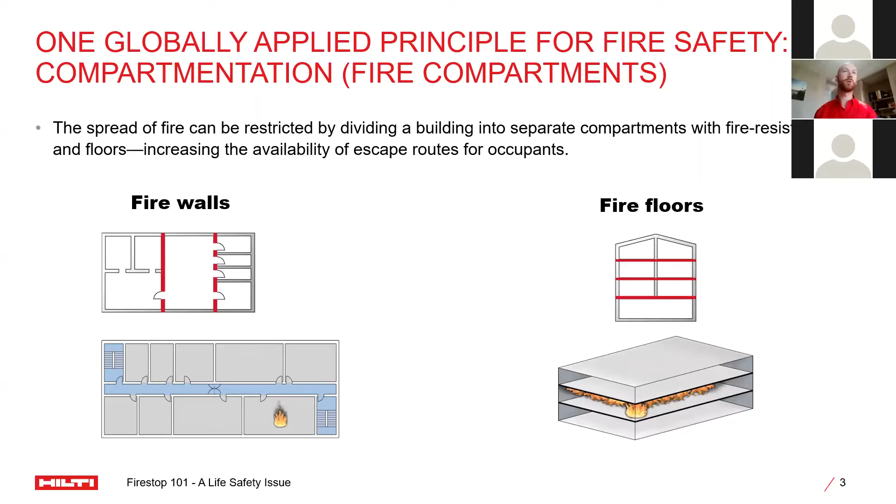So when designers are designing a building, they'll break up that building into subsections using both fire-resisted rated walls and fire-resisted rated floors.

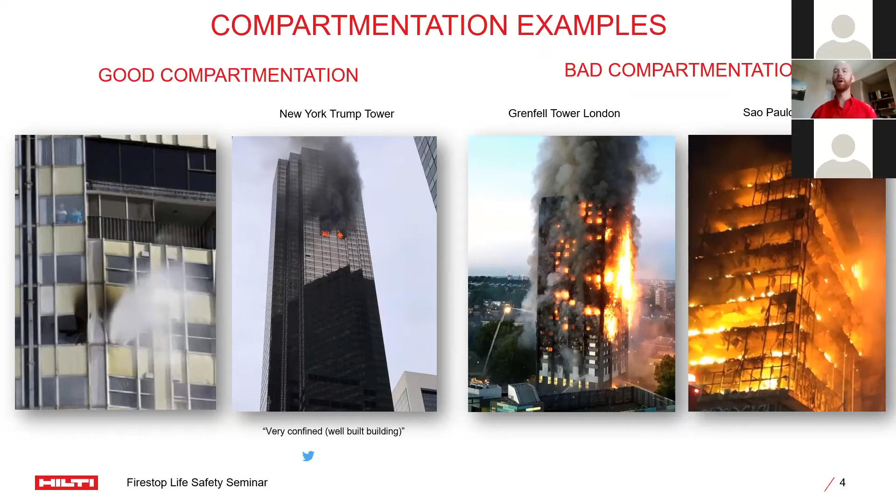Some poor examples of when fire compartmentation goes wrong. For example, in Grenfell Tower in London, this was a fire that happened in the middle of the night in a residential building, and it spread rapidly and quickly throughout that building because of poor fire stopping, resulting in several deaths. So what we're trying to do with good compartmentation is these examples on the left, and avoid these horrible life safety issues on the right.

So we've got the concept of compartmentation. Our designers have built this building with subsections using fire-resistant rated floors and walls, but we do have areas in this building that allow for the spread of smoke and flame.

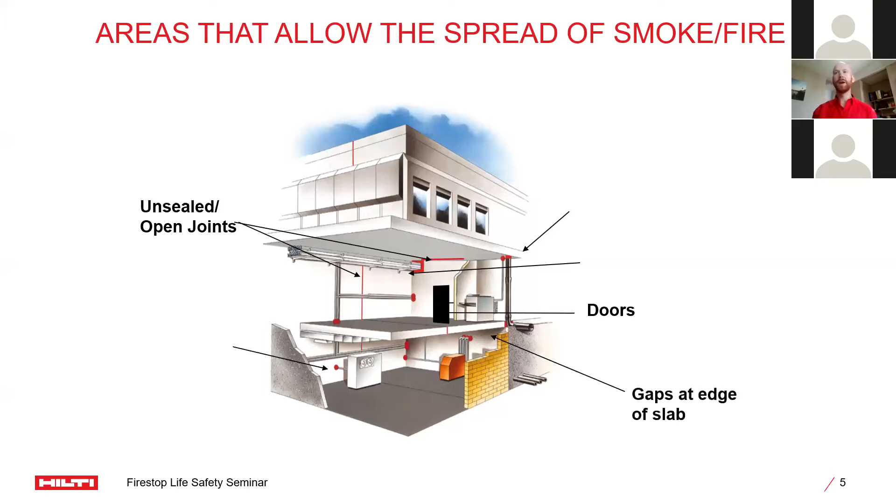These areas would be unsealed or open joints, such as wall-to-wall or floor-to-floor expansion joints or head-of-wall joints that we need to be looking at, doors or enclosures that we will talk about a little later in this presentation, and gaps at the edge of slab, more commonly known in the industry as curtain wall applications for fire stopping.

And then unsealed pipe penetrations, ducts, cable penetrations for cable bundles or cable trays, and membrane or one-sided penetrations, most commonly outlet boxes or tub boxes that we'll see have deteriorated our fire-resistant rated walls or floor assemblies. So these are the areas that are going to allow the spread of smoke and flame and need to be addressed with fire protection products.

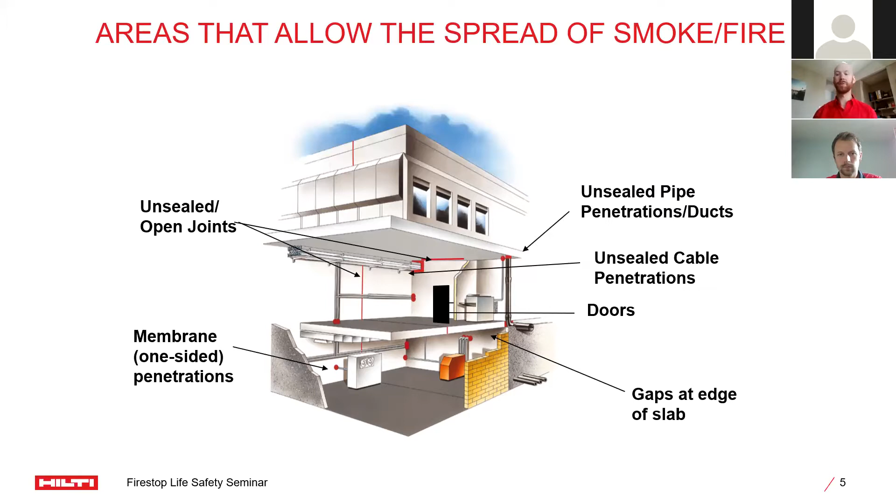I'll pass it over to Andre to talk about some of the regulations that we have in Alberta.

So let's start the most exciting part of today's presentation, which is regulation. There are 4 main documents that regulate activities related to fire safety in new construction and renovation. The first is the National Building Code of Canada. As a model building code, it has no legal status until it's adopted by a jurisdiction that regulates construction, so in Canada it will be provinces. This code forms just the basis for all provincial building codes. For federal buildings such as airports and military projects, we should follow the requirements of this code. All other residential and commercial projects in Alberta should be designed and built in accordance with the provincial building code, something like National Building Code of Canada, Alberta edition. The latest edition is 2019. So Alberta is committed to use the National Building Code of Canada as a base document, and we just modify it to suit Alberta's needs in regulating design and construction.

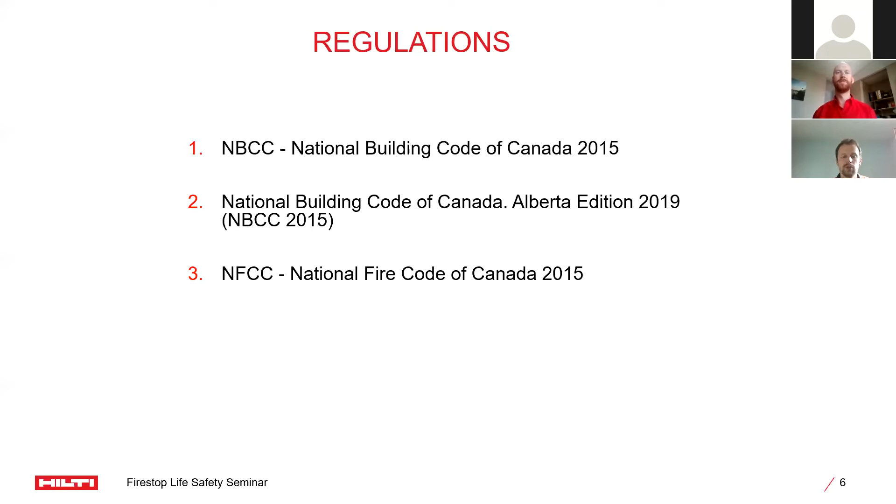So the next document is the National Fire Code of Canada, 2015. A building can be designed and built fire safe, let's say 30 years ago. In order to keep it fire safe, we should follow the requirements of the National Fire Code of Canada. And the last one is regional and municipal laws and bylaws.

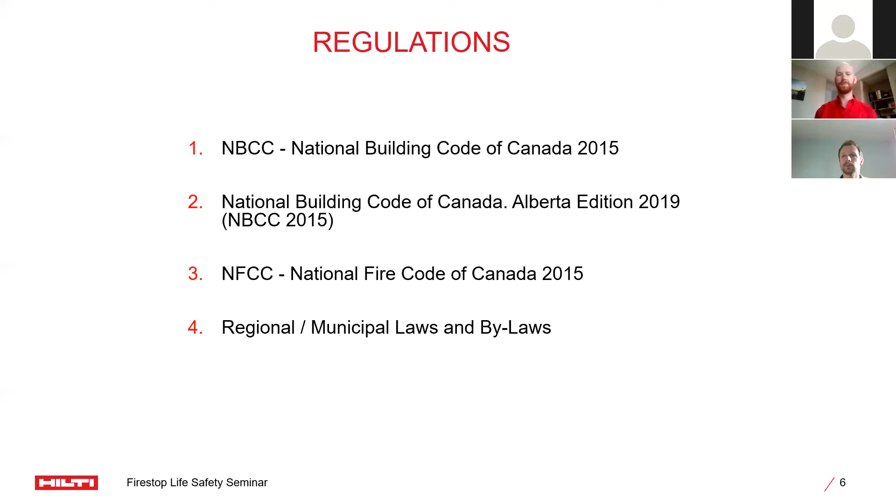Now we'll go through some useful definitions that the Firestop community should be familiar with. The first of which being fire resistance rating. This is the rating that happens to the substructure, and it means the time in minutes or hours that a material or assembly of materials will withstand the passage of flame and the transmission of heat when exposed to fire.

So what this is basically saying is when a designer is looking at different fire-resisted floors and walls, there are specific conditions of a test that those will need to go through, burned and timed, to make sure they pass this test for a duration of time. When they have that test passed, it'll be passed by a third-party organization, and it will be adopted into different floor or wall assemblies. So they will have what's called a fire resistance rating.

Other terms we need to be familiar with are the difference between combustible and non-combustible type materials. The difference being, when exposed to flame, combustible materials will tend to lose a lot of their mass. Materials like wood, plastic, or insulation will burn in a fire test, and a lot of the time they lose a lot of mass or deteriorate quickly. Whereas non-combustible materials like concrete, brick, or metal will hold a lot of their mass and not necessarily melt right away in the event of a fire.

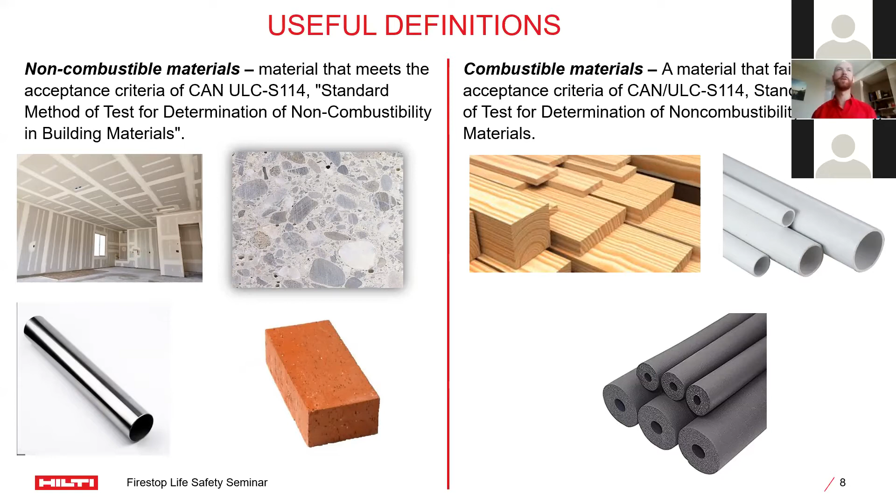Which brings us to our next definition, quite familiar within the Firestop community: the concept of intumescence. It's a term that describes materials designed to expand significantly when exposed to heat. So when thinking about fire stopping, if we've got a combustible plastic pipe penetrating a fire-resistant rated wall, we know that pipe is going to melt quite early when fire hits it. So we need a material that will expand and choke out that pipe so it doesn't leave a hole where the pipe has melted. The concept of intumescence is very familiar to the Firestop community, and we need to know when to apply this product on which type of applications.

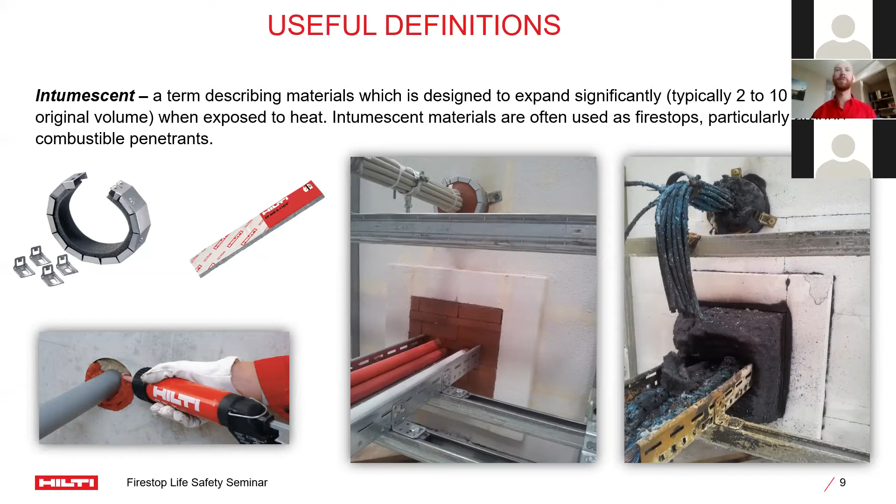Another term we use quite often is annular space. Annular space is the distance between the outside of your penetrating item and the inside of the hole. Oftentimes there'll be more than one distance, so a minimum and a maximum of annular space. This is because, as much as the construction industry wants everything centered, oftentimes that penetrant will likely be off center. So you'll have a minimum and maximum annular space when dealing with these types of penetrants. We need to be familiar with this when dealing with fire protection and understanding the tested systems and what that language means.

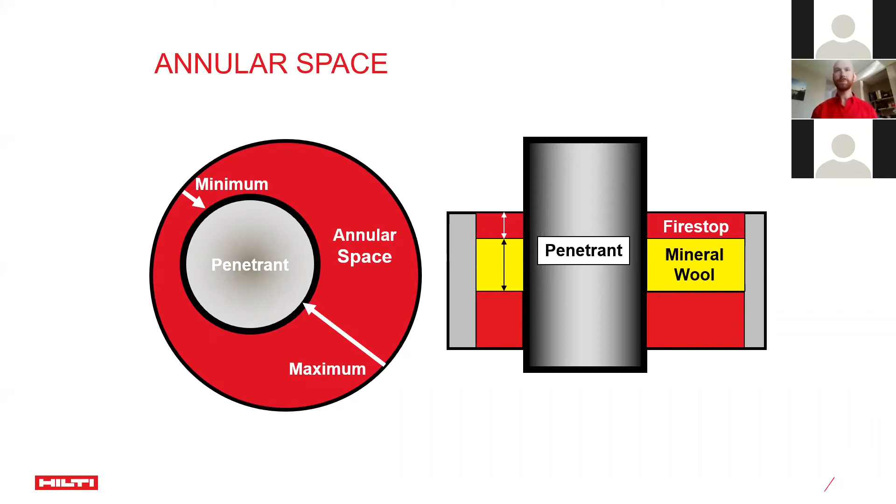One term I see misused quite a bit in the construction industry is the term firewall. Not every wall in a building with a fire resistance rating is a firewall — it's a very specific type of construction or application. A firewall is a type of fire separation of non-combustible construction that divides a building or separates adjoining buildings to resist the spread of fire and has a fire resistance rating as prescribed in the code. The biggest thing about it is it's got structural stability to remain intact under fire conditions for the required fire rated time. So the concept of this wall is its own substructure.

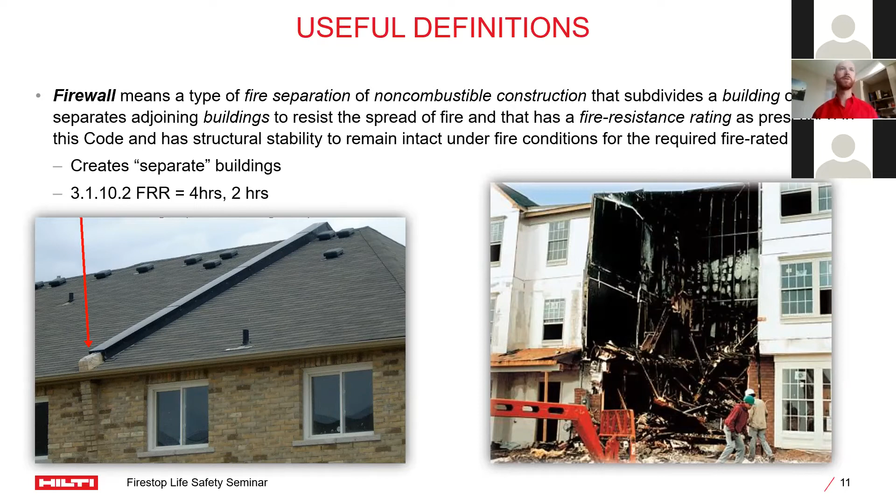If we look at the picture on the right, on the fire side of this wall, this whole building is able to collapse under that fire, but the non-fire side and the wall itself, because it's structurally intact, will remain separate and intact after that building has collapsed, protecting the non-fire side of this application. So it's got very specific requirements for this firewall, and we just need to know the difference between a fire resistance rating of, say, a regular gypsum wall versus what a firewall is, because they will have different requirements to them, which we'll get to here in a sec.

Through-penetration firestop systems are tested to CAN ULC S115. The most common term we use is an F rating, which will be thought of as a fire rating or flame rating to the community. It's basically the duration of time in which flames do not pass through the system. So if we've got a fire resistance rated gypsum wall, in order to achieve a 1 hour fire rating, no flames can pass through that wall for a 1 hour duration from the fire side to the non-fire side. This is what we're going to see with the majority of our ratings.

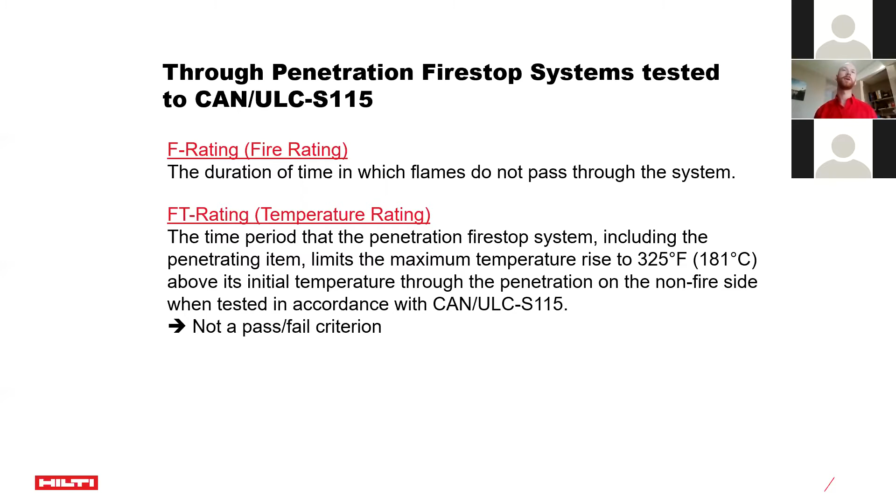Another rating we might see in some applications is the FT rating, a temperature rating. This is the period of time that the penetration firestop system, including the penetrating item, limits the maximum temperature rise to 325 degrees Fahrenheit above its initial temperature through the penetration on the non-fire side, when tested in accordance with CAN ULC S115. Essentially this is trying to limit the temperature rise from the fire side to the non-fire side, including that penetration. We'll talk more about FT ratings and where we might find them in our Alberta construction projects in a few slides.

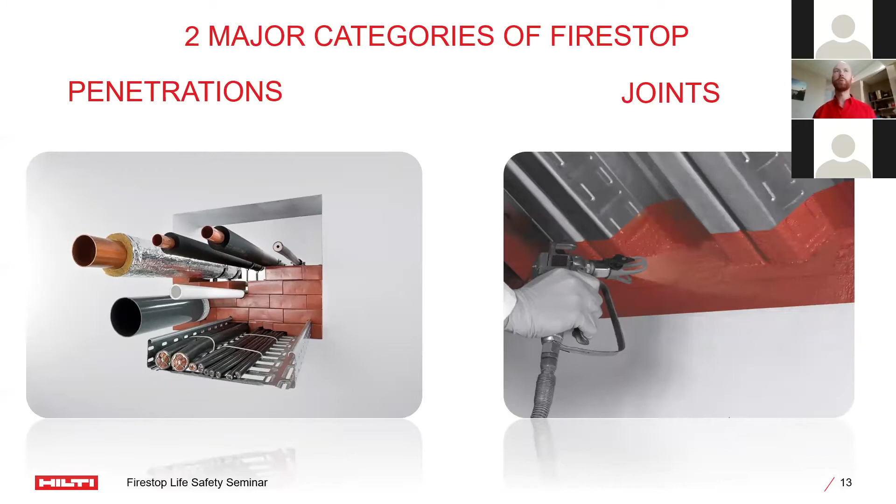There are two major categories of firestop that we will see in our projects: penetrations and joints. There are a lot of types of materials we're going to see on our projects, and it's important to know how these penetrants react in a fire.

For example, the most common contrast I can show you is a metallic pipe versus a plastic pipe, combustible versus non-combustible. We know that a non-combustible pipe, in the event of a fire, may not melt, but it will transmit heat from one side of that assembly to the other quite well. Whereas a plastic pipe will likely leave a hole in that fire resistance rated assembly. So we need to understand how these different types of penetrants react in a fire in order to provide the correct solution.

Other penetrants we might see in construction projects include cable bundles, cable trays, insulated metal pipes, ducts or mechanical shafts, which we'll get to in a later slide, and mixed or multiple penetrations. For example, contractors on site already have a hole, and instead of making his own separate hole, an electrician decides to run his cables through the hole already created. So we have cable bundles and different piping running through that same opening. We need to know what types of penetrants are on our sites in order to provide the correct solution for them.

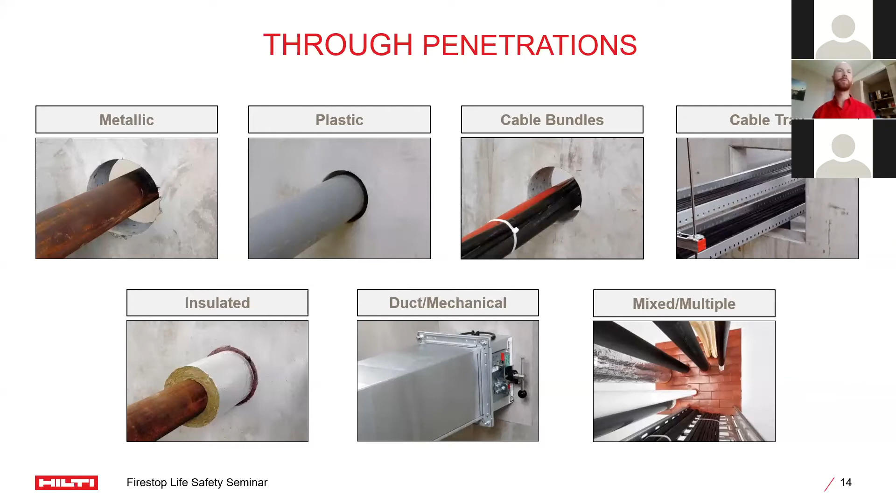Now, diving into a bit of the National Building Code, I'll give you some verbiage for clarity. When looking at penetrations specifically, the code gives us two options. Penetrations of a fire separation or membrane forming part of an assembly required to have a fire resistance rating shall be sealed by a firestop that is subjected to the fire test method CAN ULC S115, with an F rating not less than the fire protection rating required for closures in that fire separation. So our first option is to deal with that penetration with a firestop tested to CAN ULC S115.

Our second option is to cast that penetrant in place. For example, if you've got a concrete slab, the code allows for a pipe to be cast into that slab and not treated with a firestop product.

There's some ambiguity or loose language in this second option, in my opinion, because it's not commonly sought after in the construction industry, as it doesn't allow for any thermal contraction of that pipe. So for the plumber's concern, if the pipe is expanding or contracting, it won't be allowed to if it's cast into that concrete slab. Secondly, this allows for plastic pipe to be cast into the concrete, and as we know, if there's no firestop product applied around that plastic penetrant, that leaves a void or opening in our fire resistance rated assembly. It's not the code's intent to allow for those kinds of things, so it's not commonly seen in the industry, but these are the two options the code presents to us.

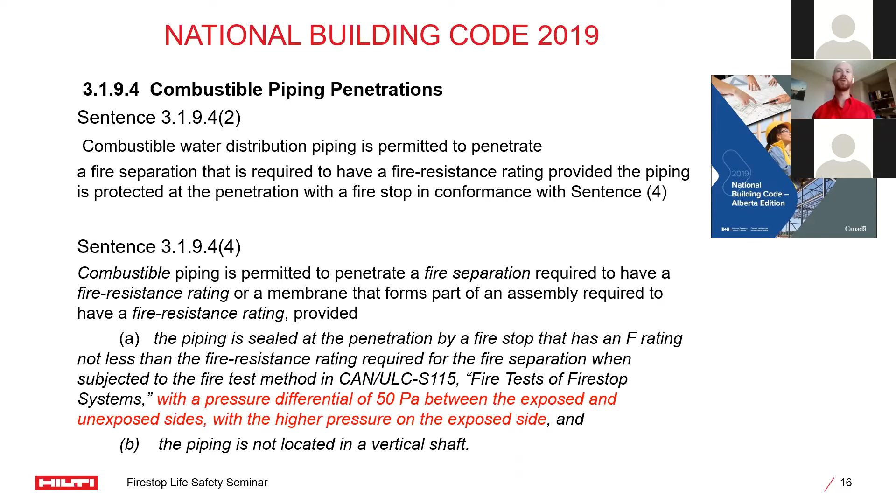Other language in the code I want to point out is the FT rating, the fire and temperature rating I mentioned before. The code language states: penetrations of a firewall, or a horizontal fire separation, that are required to have a fire resistance rating in accordance with Article 3.2.1.2, shall be sealed at the penetration by a firestop that, when subjected to fire test method CAN/ULC S115, Fire Test of Firestop Systems, has an FT rating not less than the fire resistance rating for the separation. So what this is saying is we've got two different types of fire resistance rated structures that will specifically require both a fire rating and a temperature rating.

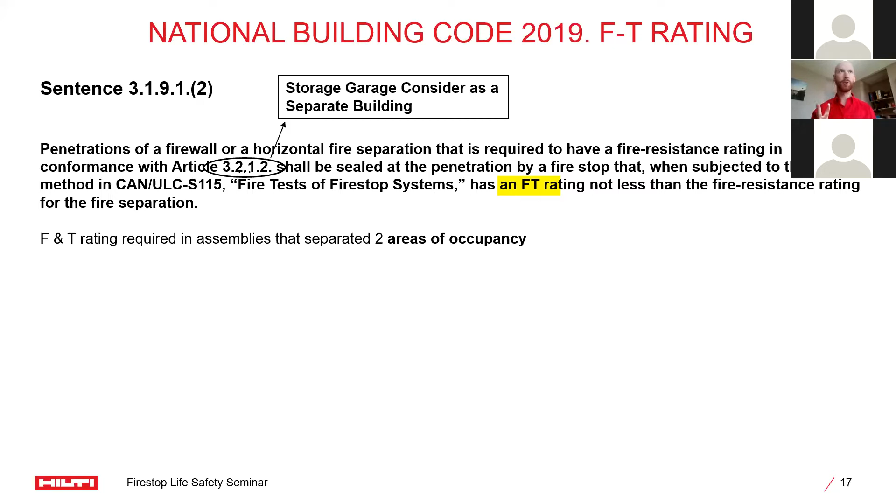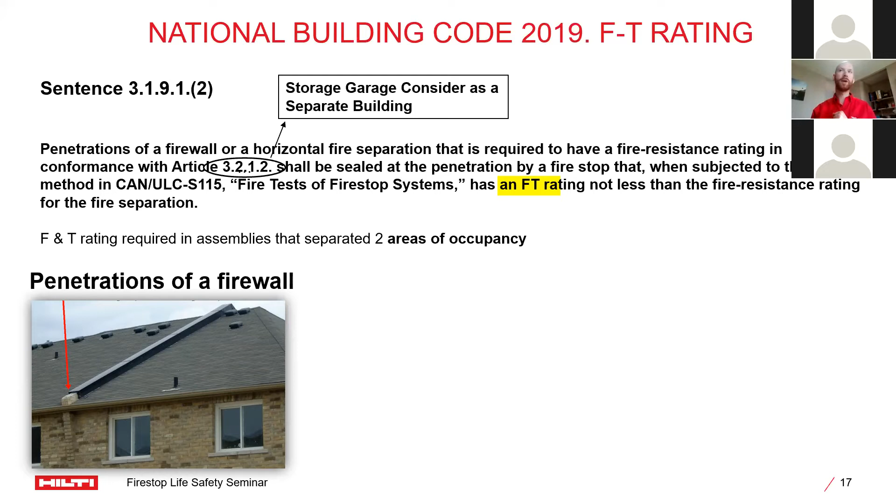Those two applications are in our firewalls. As mentioned, that very specific type of fire resistance rated wall is its own substructure. If we have a penetration running through there, we need to test it to both a fire rating and a temperature rating. The other area we'll see this is a horizontal fire separation, most commonly seen in penetrations of a podium slab between a parking garage and a residential unit. So if we see a horizontal fire separation in our buildings, we need to understand that it needs to pass both a fire and temperature rating.

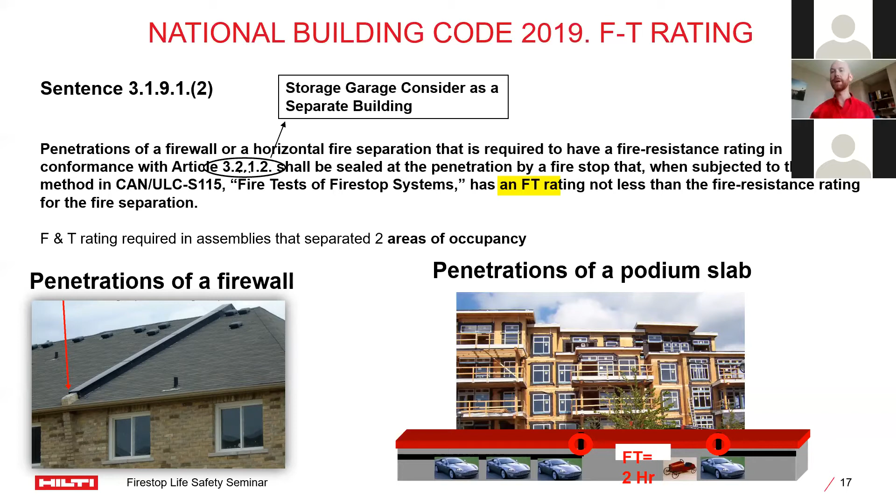So for example, if we've got non-combustible drainage piping through that slab from the residential unit down to a parking garage, we'll need to achieve that fire and temperature rating. To give you guys a bit of a visual of what that temperature rating might look like, we've got two pictures here.

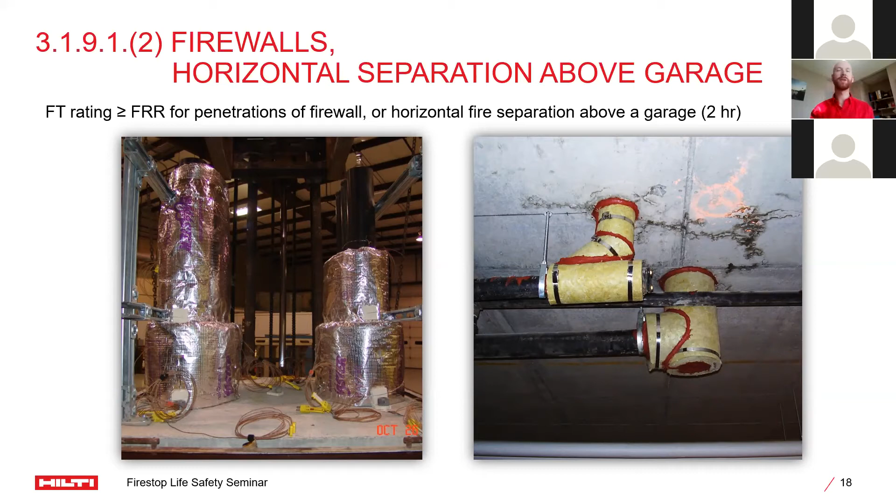Sprinkler membrane penetrations - I wanted to touch on this because there's some language in the code I want to provide clarity on. Sprinklers are permitted to penetrate a fire separation or a membrane forming part of an assembly required to have a fire resistance rating, without having to meet the firestop requirements of sentences 1 to 3, provided that the annular space created by the penetration of a fire sprinkler is covered by a metal escutcheon - it looks like a metal plate covering that sprinkler line.

So I want to provide some clarity here. If we're looking at this language, if we have a sprinkler head that has that metal plate, the code language says that penetration, even through a fire resistance rated assembly, does not need to be treated. However, this does not also encompass through-penetration sprinkler lines if they do not have this sprinkler head and metal plate. So sprinkler lines need to be protected with a firestop product if they're penetrating through a fire resistance rated assembly, unless it's a sprinkler head with that metal plate covering the annular space. Hopefully that provides a little bit of clarity.

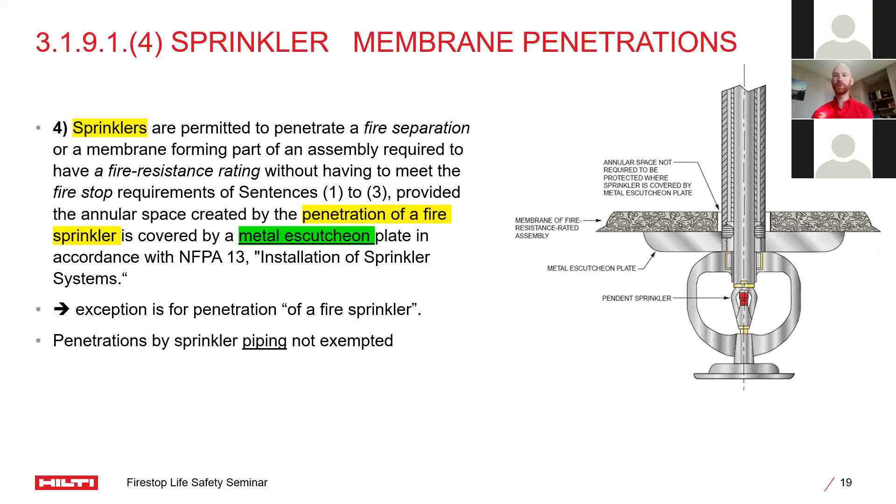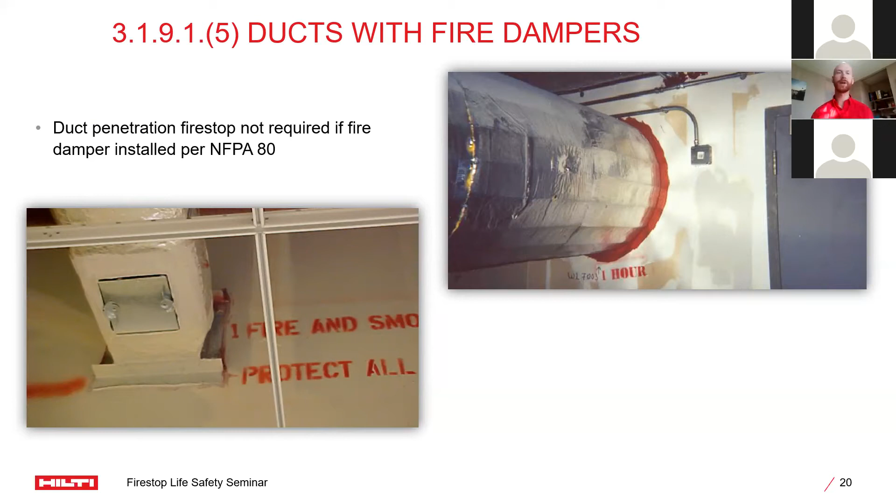So you'll see these on site. They'll have a little hatch at the bottom, and that's for inspection purposes throughout the longevity of that building. So for these types of applications, if that duct has a damper and it's installed as per NFPA 80, you will not need a fire protection or Firestop material around that type of penetration. However, if you have a duct without a damper that runs through a fire-resistant rated wall or floor, we'll need to apply some sort of Firestop material to that application. So hopefully that provides a little bit more clarity on that application.

Lastly, one of the big changes that we had pertaining to fire protection within the 2019 National Building Code of Canada is a notable change to outlet boxes, often referred to in the industry as membrane penetrations. Obviously, if we have an outlet box that penetrates a fire-resistant rated wall, it will deteriorate the rating of that wall. Now there are exceptions to this, and I'll get to them in a second, but the code language states that we do need to apply a Firestop product to this application, unless we meet 4 different requirements to allow for this exception.

The code language is very technical and lengthy, so I'll give you the Coles notes for each one of these conditions in order to waive that fire rating. First is the size of that outlet. The code language says 0.016 meters squared. I don't know about you guys, I can never visualize that very well, so we've translated it here—it's basically a 25 square inch area, so a 5 by 5 inch outlet box.

Next condition is an aggregate area of 100 square inches in any 100 square feet of surface area. To break that down a bit more, it's how many outlet boxes you have in a certain area of rated wall. So if we have a box that's too large or too many of these boxes in that same area, these will need to be fire rated.

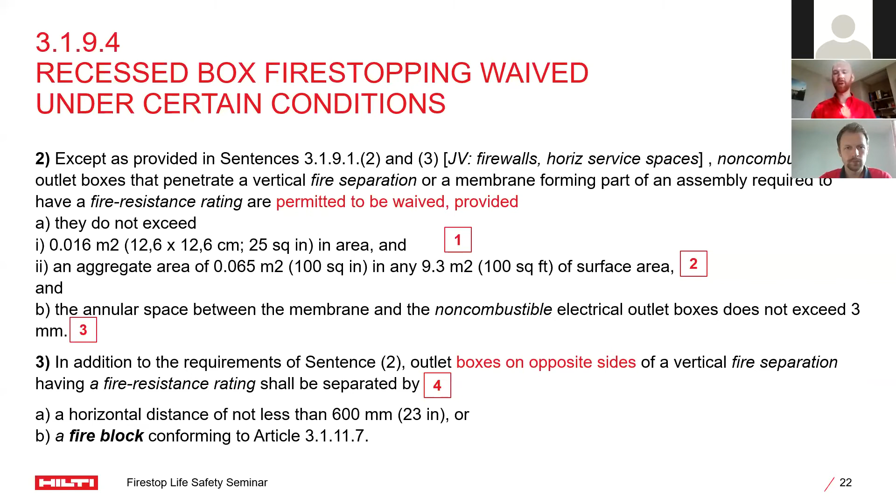I know that this can cause a little bit of confusion, but hopefully that breaks down the code language with a little more clarity on when we do and when we don't require Firestop around those membrane penetrations. I'll now pass it over to Andre to talk a little bit about Firestop joints.

So thank you, Cody. The next part of today's presentation is code requirements for Firestop joints. On this slide, you may see some typical joint applications.

On top left, you see the top of wall joint between the gypsum board wall and concrete over Q-deck, here we have a castle cut. Just below that, we have a joint between the same assemblies, but in this case the gypsum board was cut straight, and the firestop solution consists of mineral wool and spray. Top right is a concrete block wall going up to the concrete over Q-deck above, and the bottom right is a joint between the concrete block wall and the concrete floor.

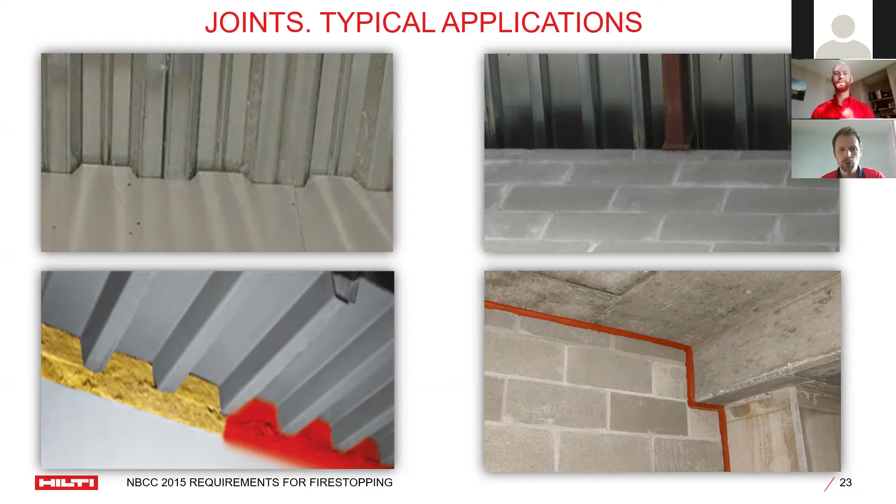What the code says here is much simpler and easier than with a penetration. Requirements for joints fall under the continuity of fire separation statement. It says the continuity of fire separation shall be maintained where it abuts against another fire separation, floor, ceiling, roof, or exterior wall assembly. So if you have a fire separation, it can't stop 2, 10, or 100 millimeters short of the next assembly. The fire rating has to extend all the way to the next assembly, so code doesn't allow any unprotected gaps between assemblies. Top of wall and bottom of wall need to be firestopped.

How should we do it? In accordance with Appendix A, we have to fill in all openings at the junction of assemblies with materials that will ensure the integrity of fire separation at that location. So basically, code says to use firestop materials to fill this gap. And we have a second requirement that says the physical characteristics of materials need to be taken into consideration, so we should use flexible enough materials to accommodate joint movements. This is basically all we have in the National Building Code related to firestop joints.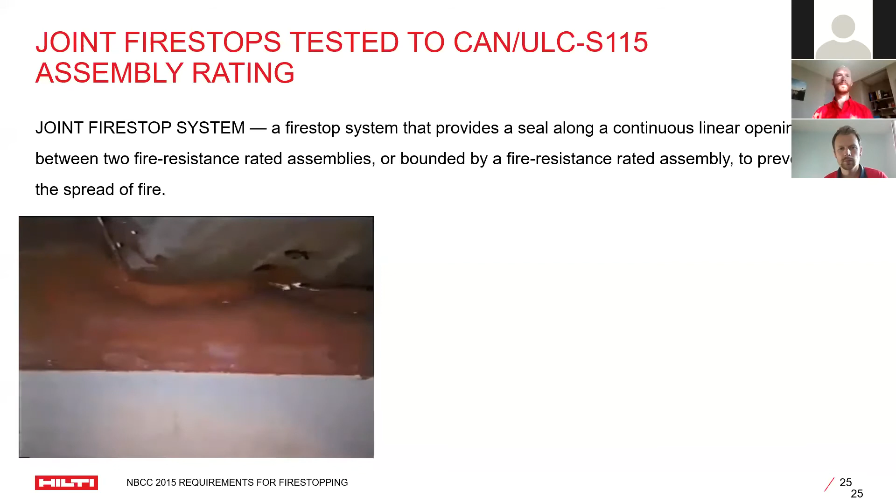After curing completely, it is administered the 500 cycles. This particular test here shows, similar to our UL listing, the 50% compression and extension, and you can note how well the material is adhering to the underside of the metal deck and the gypsum.

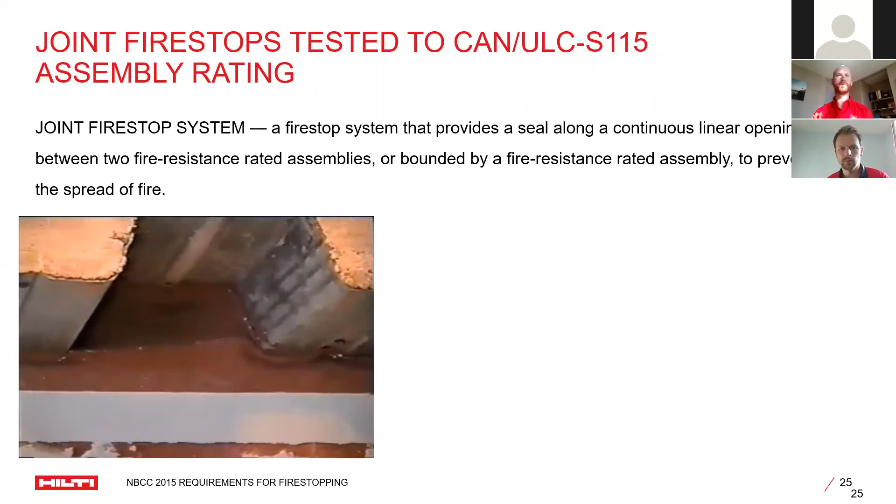So when we ensure the dynamic integrity of the joint, we proceed with a fire test. On the right photo, you may see the joint from the unexposed to fire side. We obviously don't want to see any smoke or fire passage through this joint. Installed thermocouples also measure the temperature conductivity of these joints for T rating.

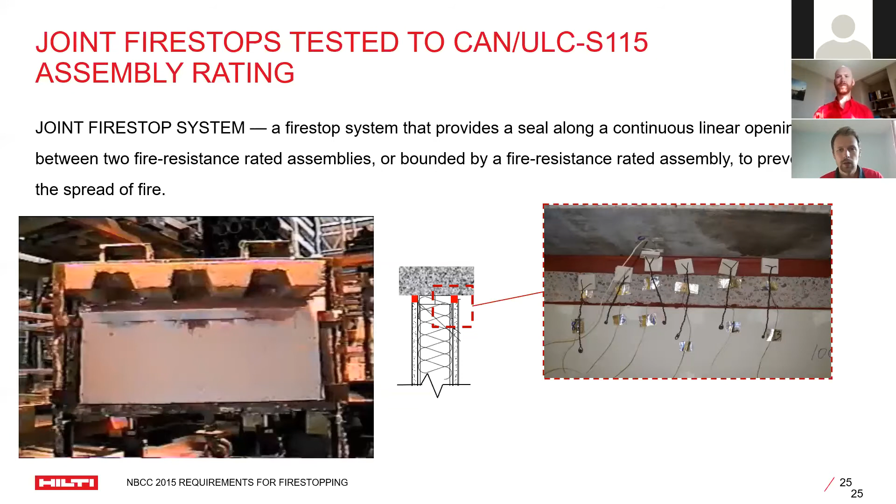Just a few words about the testing. Before we declare that such and such product could be used to firestop a pipe or cable penetration through a rated assembly, it should be tested in accordance with certain standards. For Canada, it will be CAN-ULC S115. This standard gives us clear guidance on how to run the test, what the temperature curve should be in a furnace, and all other necessary details.

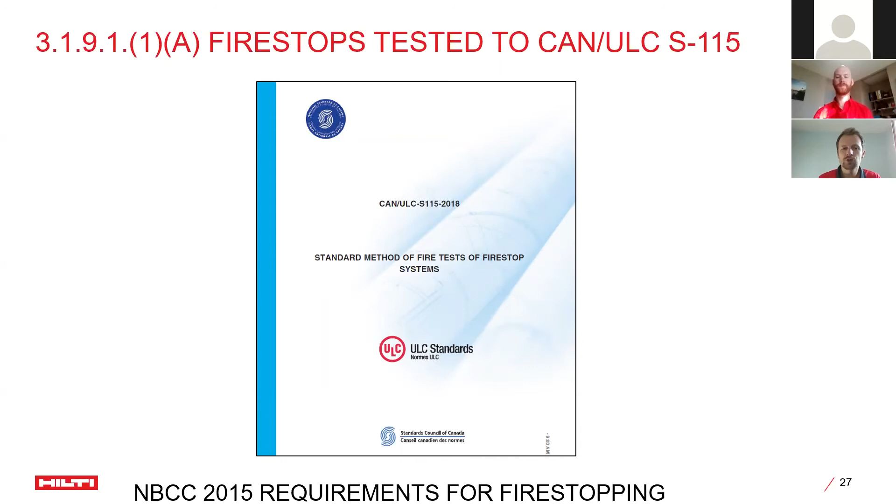The next video shows the way we test our materials at our testing facility down in the US.

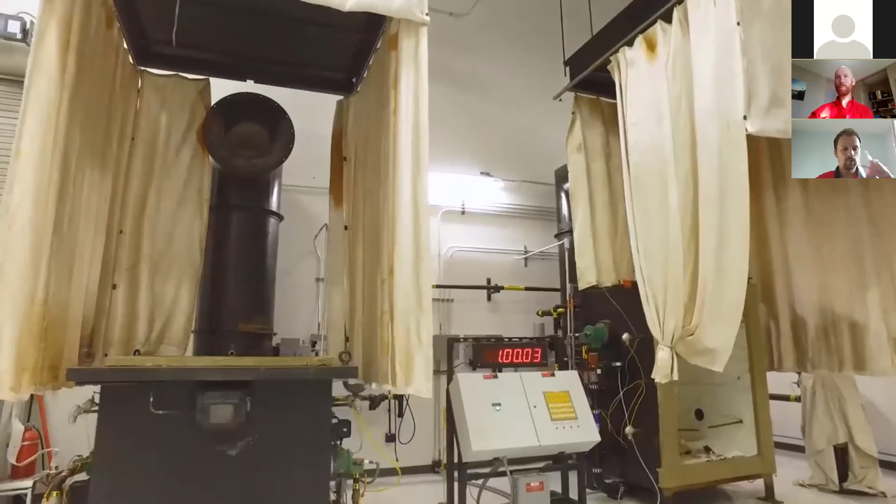Welcome to the Hilti Western Hemisphere Product Development Center. You're in our North America firestop testing facility, where we test all of our fire protection products in accordance with UL, CUL, and ASTM standards. There are two furnaces in this facility. The one on the left is used to test floor or ceiling applications, while the one to the right is for wall applications. The testing process begins in our prep area.

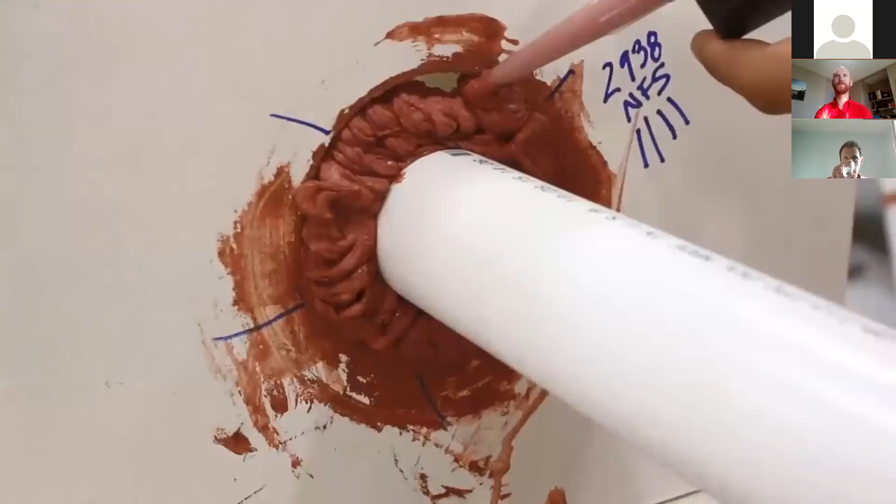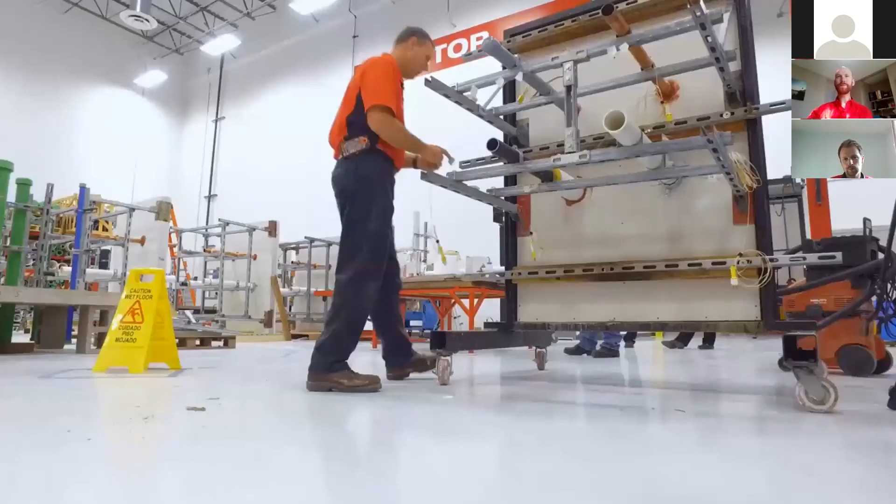In this example, the assemblies consist of plastic, insulated, and non-insulated pipe penetrations. Hilti firestop solutions like FS-ONE MAX and firestop collars are installed around the pipes. Once the assemblies are built, we add thermocouples to measure heat transfer through the assembly and the pipes as required by the testing standards. As final touches are put on the assembly, technicians prepare the furnace and afterburner.

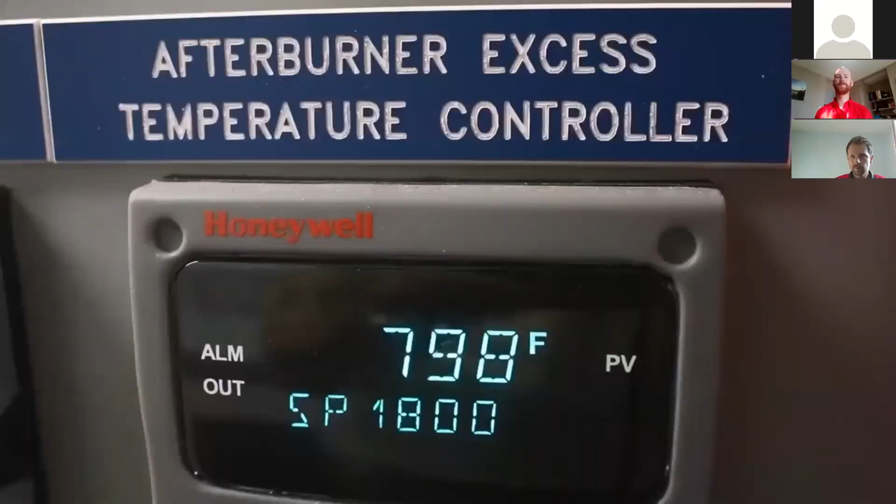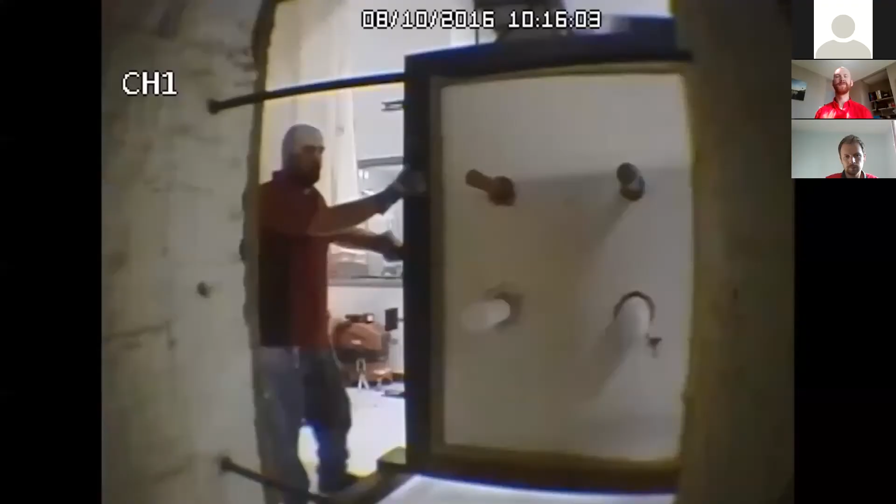The afterburner is a high-powered incinerator that burns the smoke and gases generated by the test itself. When it's ready, the assembly is carefully secured to the furnace. Lead wires from the thermocouples are attached to the monitoring system and tracked with our computer program.

With a mouse click, the furnace's burners are ignited and the test begins.

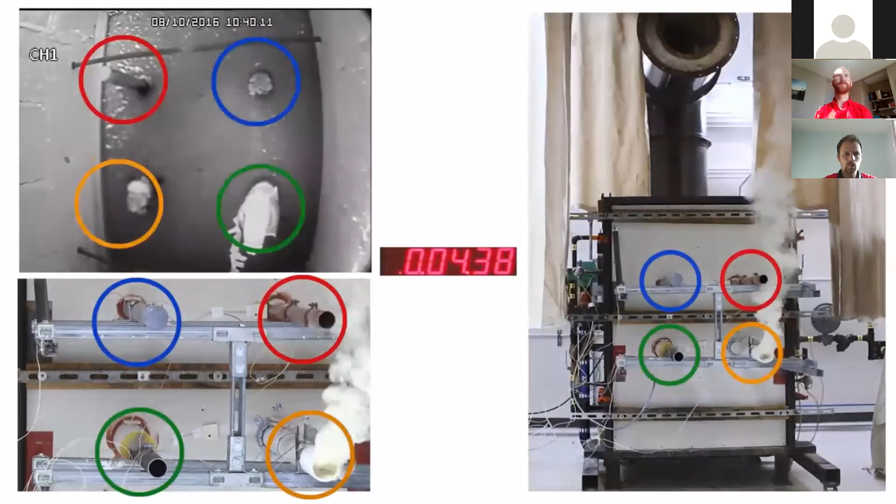Within a few minutes, the PVC pipes and insulation on the fire side of the wall melt away, causing them to ventilate smoke into the room. Heat causes graphite in the products to expand, creating a seal that continuously expands as long as the heat is applied. This closes the pipes and limits the passage of smoke and harmful gases into other parts of the building.

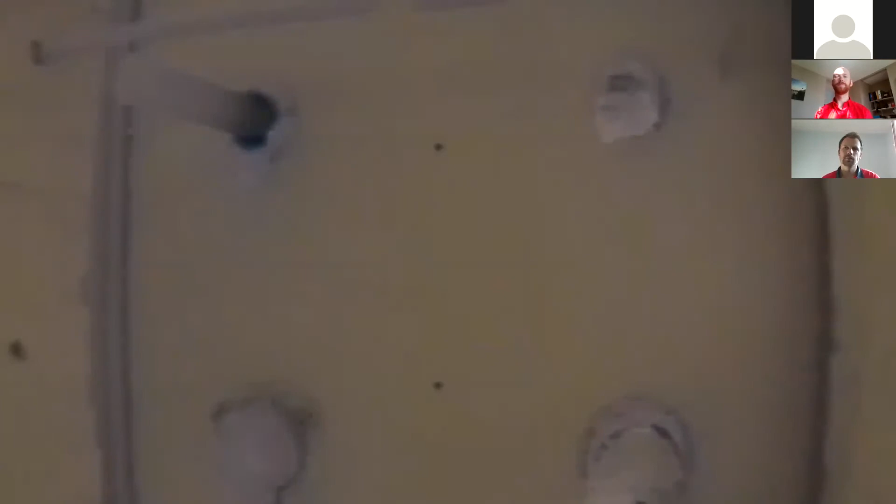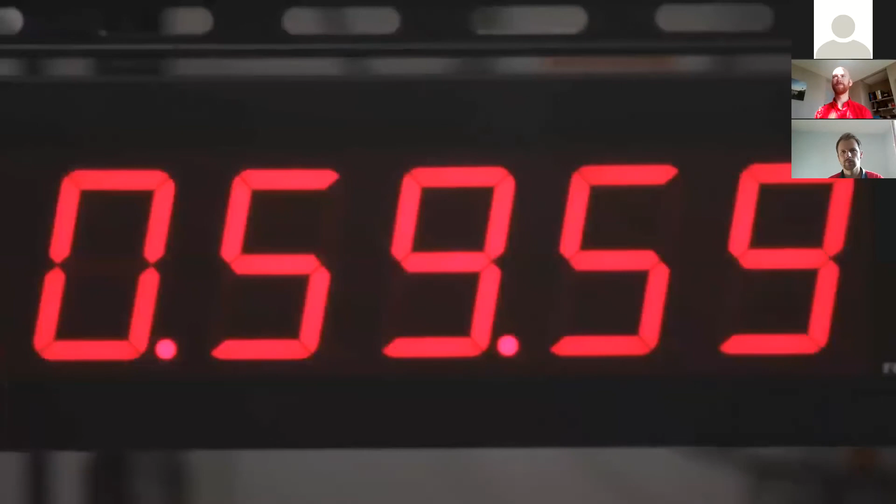After 10 minutes, the temperature in the furnace is 1300 degrees Fahrenheit. The burn test can last anywhere between 1 and 4 hours, depending on the assembly being tested. As the last few seconds tick away in this 1-hour test, the temperature in the furnace is 1700 degrees.

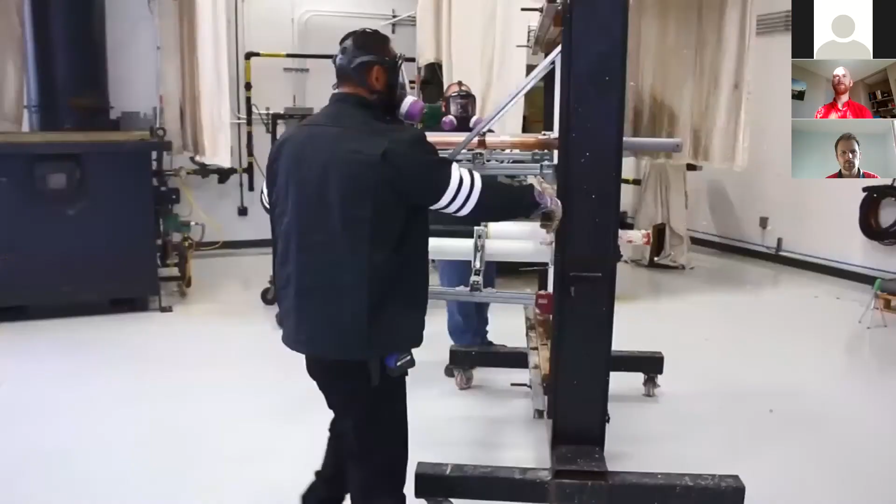Our products have done their job to protect the penetrations and to keep the fire on one side of the wall. As you can see, there's not much left of the pipes exposed to the fire.

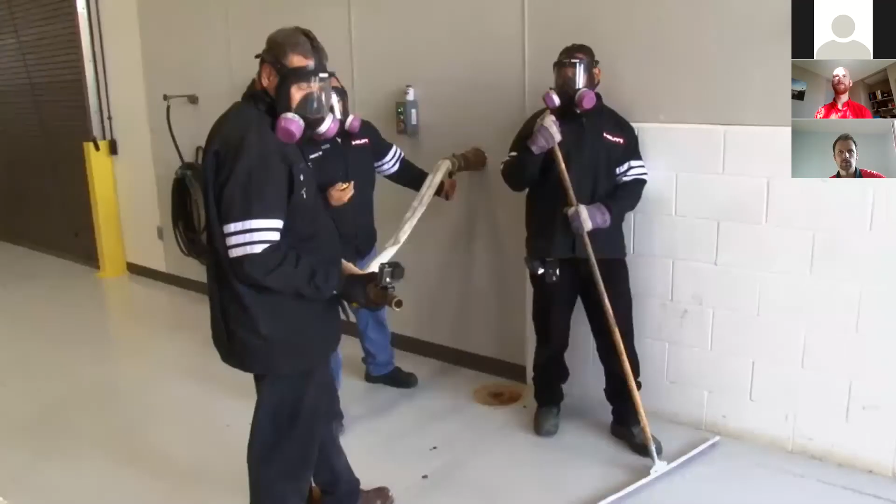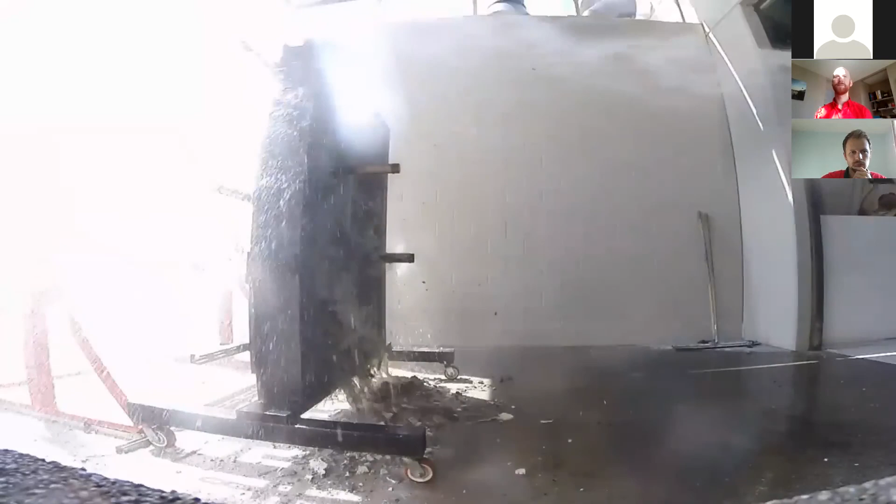The fire side of the assembly will now be subjected to a powerful stream of water. We use an authentic fire service hose and nozzle during the test. Distance from the wall, water pressure, and spray duration are all dictated by ASTM and UL test standards. As the water hits the superheated sheetrock, it practically explodes from thermal shock and impact of the water. This type of test helps determine structural integrity of the Firestop systems.

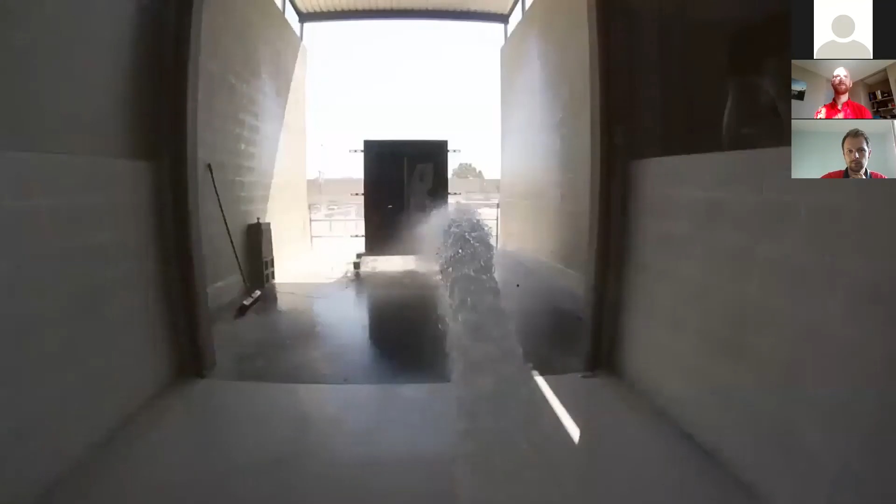As the charred wall disintegrates, most of the assemblies and leftover pipe go with it. But on the non-fire side, the assemblies remain in place exactly as designed.

So just before we get to that, the second portion of that test with the hose rating, just to provide some clarity - that's required in the States, but that type of rating and testing standard is not required for Canadian building code. Sorry, Andre. No, it's okay, thank you.

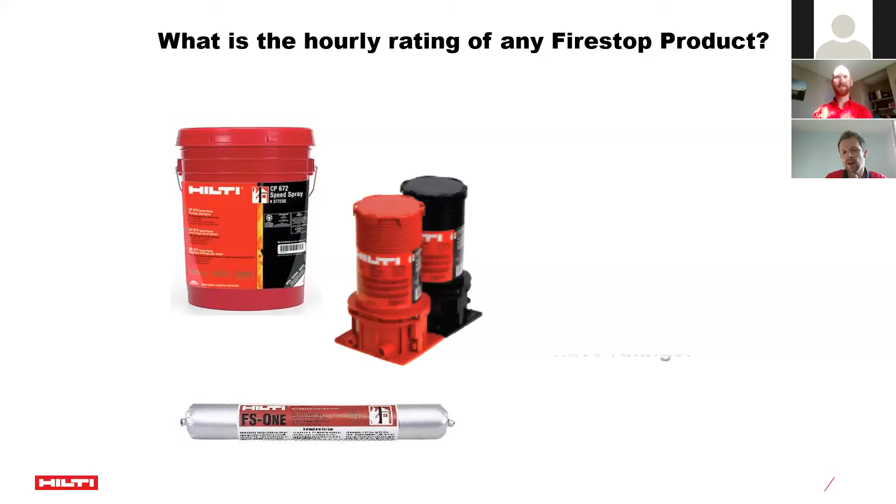So one question I always ask contractors is, what is the hourly rating of our Firestop product? And often I hear a 2-3 hour response. But the truth is that the F rating of any of our products is 0. The product itself can't have any rating - only Firestop systems have ratings.

As an example, the system on the left, CAJ 2035, is for plastic pipe penetration through a concrete slab. In this system, you see not only the Firestop collar, but all other elements involved in the test, such as the rated assembly and penetrating item, and the system has a rating of 3 hours. At the same time, we could use the same Firestop collar to firestop a penetration through a 1-hour rated gypsum board wall. It doesn't matter how good our collar is - this system with gypsum board will fail after just 1 hour and a few minutes, simply because the wall in this case is the weakest element of the system. This is why products have no F rating on their own - only systems do.

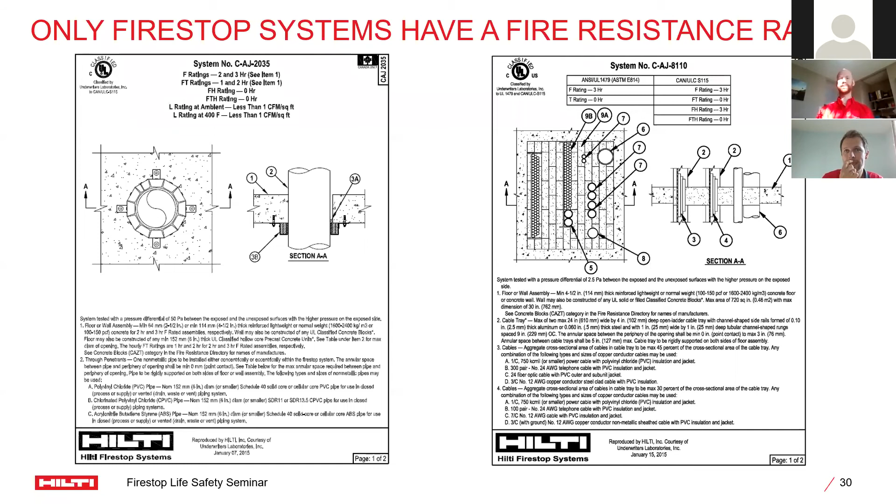How do we find the correct system for site applications? We just have to find the system that matches site conditions 100%. Let's take a look at this example: a 4-inch copper pipe running through a 4.5-inch concrete slab. The slab has an F rating of 2 hours, and the annular space between the pipe and opening is 2 inches. So CAJ 1421 looks like the right choice, and let's check if all the elements match the site condition.

First is the rated assembly - position number 1 in the system is concrete floor, minimum 4.5 inches thick, so we're good there. Next is F rating - the system was tested for 2 and 3 hours, depending on the concrete slab thickness, so okay again. Next is the penetrating item - you see multiple options listed, and one of them is a copper pipe, maximum 4 inches in diameter. Again it matches. Finally, the last one is annular space, and the system provides 2 limits: minimum annular space is 0, so we're okay if the pipe has a point of contact with the concrete surrounding, and the maximum is 5 and 3/8 inches. We just have 2 inches, so it's within the system limits.

After we confirm that all these parameters match the site conditions, we can use the system to firestop the penetration. The rest is very simple - we just have to follow this system as a recipe. So what it says is that the annular space needs to be tightly packed with mineral wool, position number 4, and then covered with just 1/4 inch of Firestop sealant, position number 5. When you've done these 2 steps, the penetration complies with the system and code requirements.

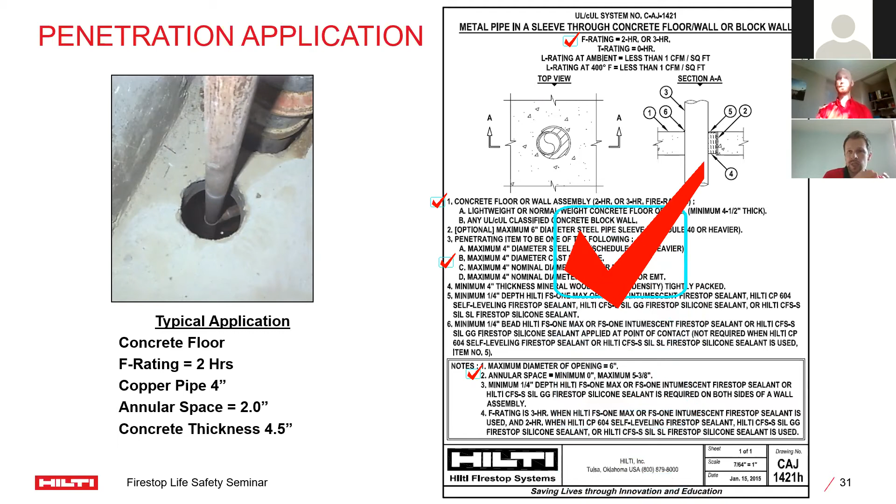We have the same approach for the joint Firestop. As an example, the top of wall joint, 1-inch width, between concrete block wall and concrete slab.

Step number 1 is to check the assembly listed in the system. Then the F rating: the system was tested for 2 hours.

The reason we usually have joints is movement requirements, and we see that this system is able to accommodate a maximum of 12.5% movement. And the last parameter is maximum joint width, which is 1-inch.

As we see, the system matches site conditions and can be used to firestop this joint. Again, all we have to do in accordance with the system is apply a minimum of 1/2-inch depth of sealant from both sides of the wall, and we're done.

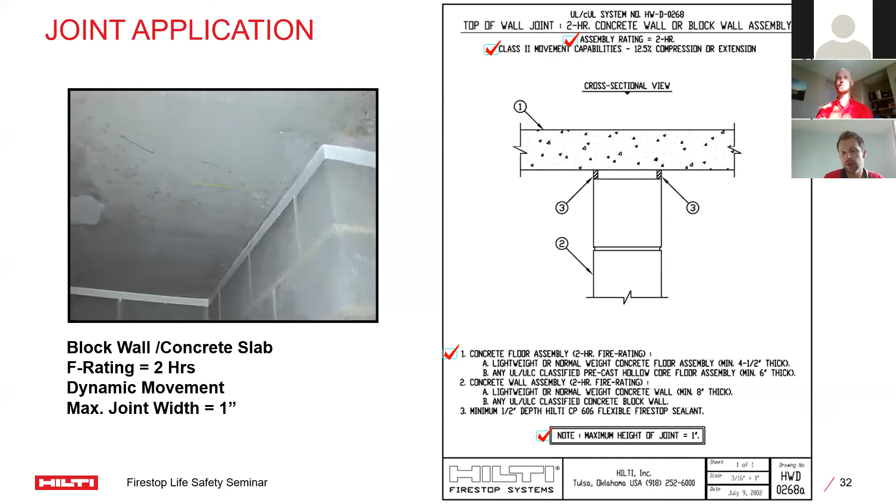Our testing team runs fire tests in our facility almost every week. We try to cover all possible firestop applications, but it's impossible to test everything, especially for renovation projects.

Some joints could be bigger than system limits. Some openings could contain dozens of different penetrants, and even if one tiny cable is not listed in the system, we can't use this system here.

So what we do in such cases, we need engineering judgment. We have a team of 20 engineers down in the US who issue hundreds of EJs every week.

Our engineers follow the guidance established by the International Firestop Council, and every issued EJ is always based on a previously tested system.

It's important to notice that the purpose of an EJ is to find a solution for clients in situations that are not covered by an existing UL system.

If a UL or ULC system exists that matches site conditions, it's the only available option, and we are not providing EJs just because somebody wants to firestop a joint a different way or using different materials.

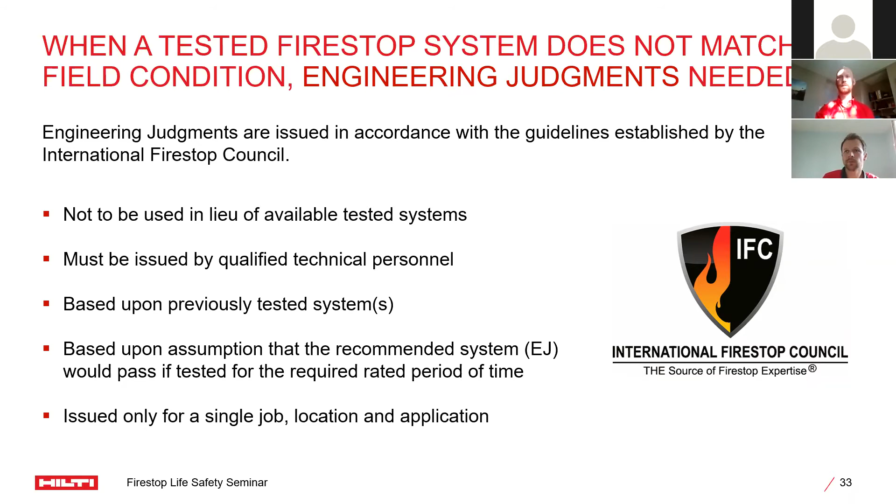Thanks, Andre. Just looking at building inspection best practices for firestop, we took a lot of this information from the International Firestop Council website regarding inspections, but we've summarized it in a couple of slides. Field inspection for penetrations: the big one is document verification.

As I mentioned earlier with the 50 Pascal testing, we need to make sure that the systems we're looking at are tested to CAN ULC S115. That's a big starting point for this.

Verify the hourly rating of the base assembly, our fire resistance rated floor or wall assembly. So if we're dealing with a 1-hour wall, we need to find a 1-hour listing; if we have a 2-hour wall, we need a 2-hour listing.

Field install versus the listing: making sure the size of the opening does not exceed what's listed in the tested assembly. Type of penetrant and wall thickness must match the tested assembly, and obviously quantity of penetrants. If it allows for more than one penetrant through the same opening, we need to verify that with the tested assembly.

Annular space: we talked about before, so the minimum and maximum, making sure that's accurate to the tested assembly. And then the specifics.

What type of backing material? Often in fire protection we have a backing material comprised of mineral wool. Making sure that backing material is applied to the thickness and compression required by the system. And then obviously sealant depth is a big one.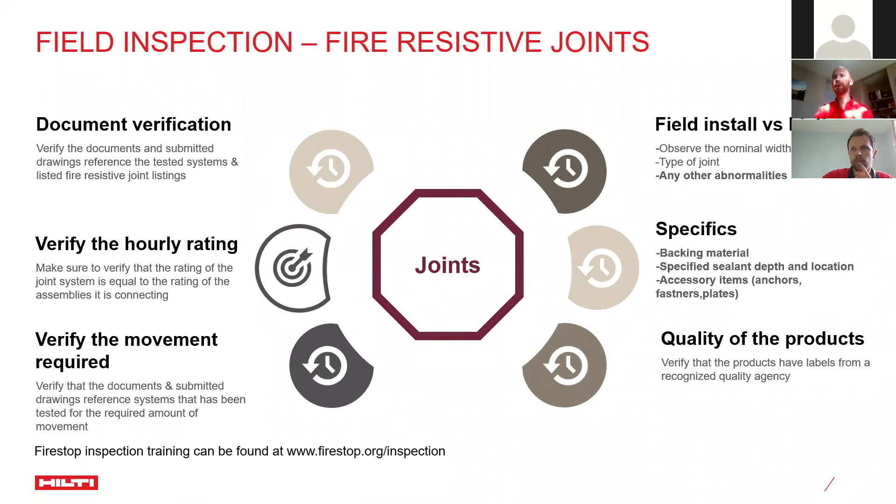So observe the nominal joint width and make sure that we're not exceeding the tested system joint width. And then the specifics, like we mentioned as well, the backing material, sealant depth - these are all big in ensuring that system is installed correctly. And then the quality of the products, which we mentioned before.

So we'll quickly take a look at some of the maybe poor applications that Andre and I have seen on site, and just comment a little bit about why they are poor.

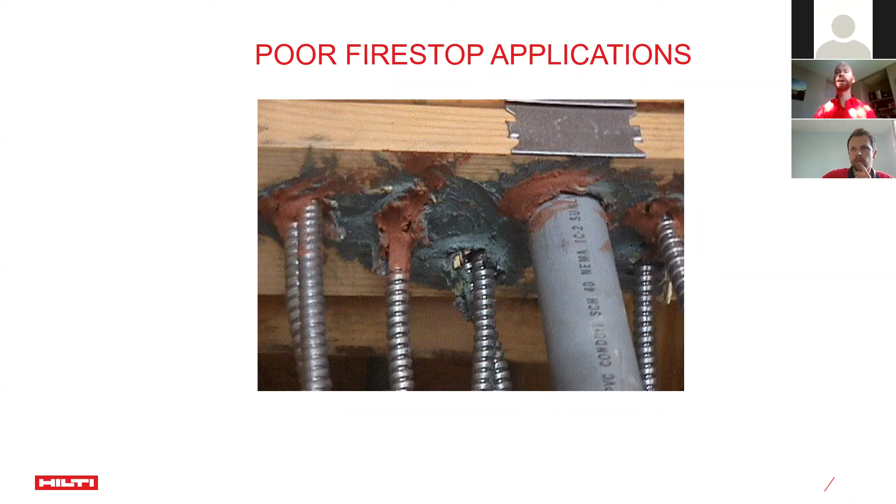So for example, we see this every now and then - it's the mixing of different Firestop chemicals. Firestop chemicals should not be touching on site because we often don't know, a lot of times between manufacturers, how these two chemicals are going to react. So we need to make sure that there's no mixing of these chemicals to ensure that those products are going to react the way that they should in the event of a fire.

We've seen this before when our customers or our installers aren't necessarily educated, and they just think they've got to fill the hole with something, and they're not looking at these tested systems. We've seen applications with expansion foam, or even a very misleading product out there - fire block expansion foam - which is obviously not a Firestop product. None of these products are going to be listed in our tested systems, and they will not be compliant with the systems, and frankly they won't stop the spread of smoke and flame.

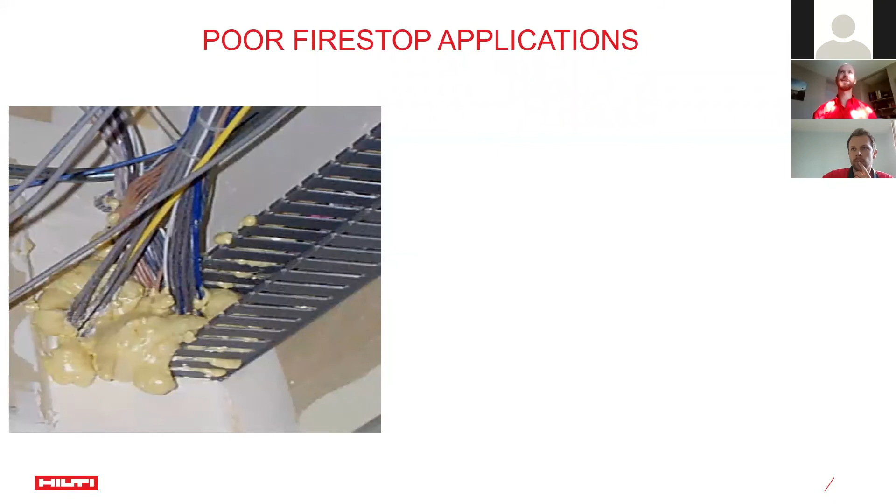They'll hinder it, and they'll burn very toxic gases as a result. Other things that we've seen on site - we've seen insulation, just material, whatever they've got on site used to plug these openings. So obviously this is not going to be code compliant.

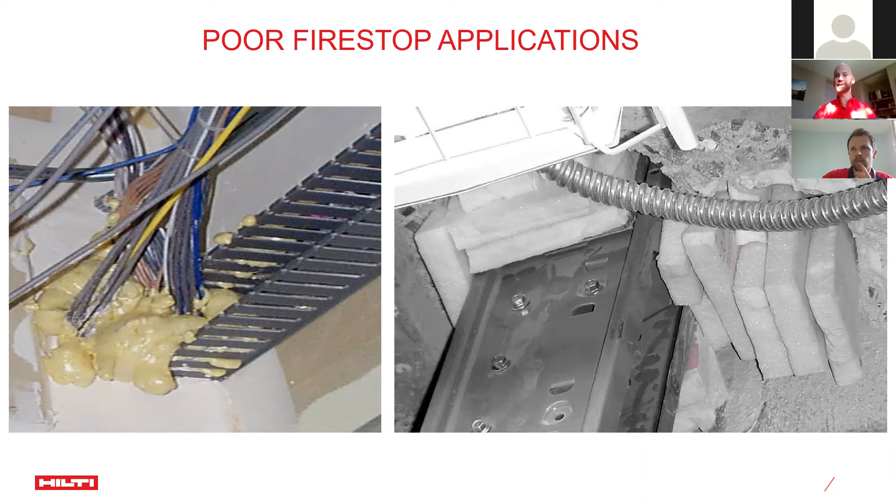Some of the applications we've seen on site as well - this is kind of a red flag whenever I'm walking through with my customers to help them out. Anytime we can see mineral wool exposed through the fire protection Firestop product, we know that's not going to be compliant with the minimum thickness of material applied on site. So on the picture on the left, we can see some mineral wool exposed through that product - obviously we haven't had the correct amount of thickness of Firestop product there. And on the right as well, we can clearly see there's mineral wool exposed on that top of wall joint.

Whenever dealing with a spray type product, we need to make sure that we have both a minimum required thickness of material, and it will state in our tested systems that it will have overlap on two of our base assemblies. So it'll require a minimum overlap on the block wall for half inch, and on the bottom side of that Q deck for half inch. So just be aware that if we can see exposed mineral wool through our Firestop product, then that's not installed as per the UL listing.

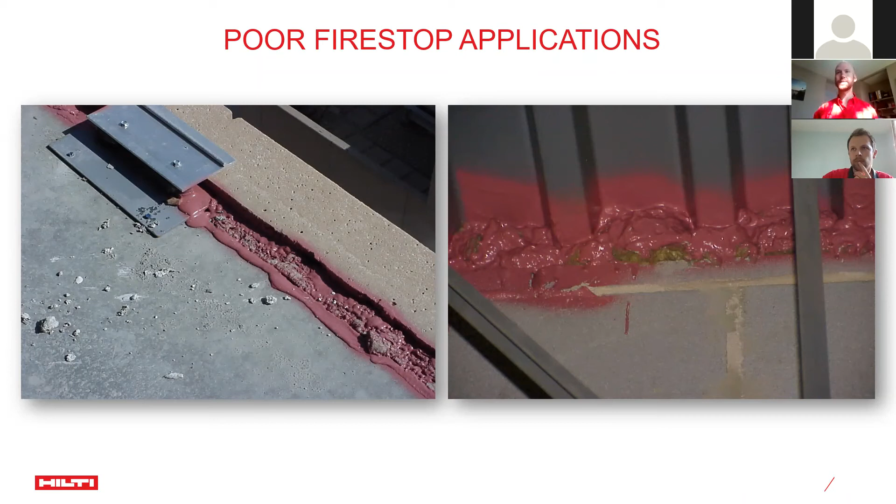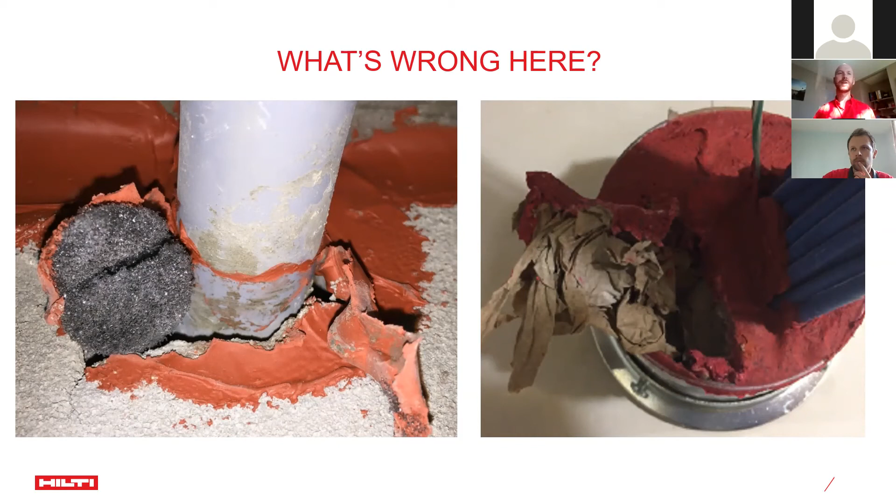This just highlights why destructive testing might be more important to ensuring that the system is compliant to the tested system. We call this the magic spray, that contractor who thinks it's all just red goop that I can apply wherever and call it fire stopping. This is all combustible piping, and obviously this needs to be addressed with something other than just a spray type material in order to pass that test.

One final thing I wanted to comment on is a little unclear in the code language. I've had conversations with many contractors and the inspection community about this: the transition of non-combustible to combustible piping through a fire resistance rated assembly. Often this is a quick fix for contractors who don't want to deal with the fire ratings of a combustible pipe. They'll transition right next to it, and while the code doesn't specifically mention this, it's not the code intent to allow it. We know combustible pipe is going to melt and will create a chimney through that assembly.

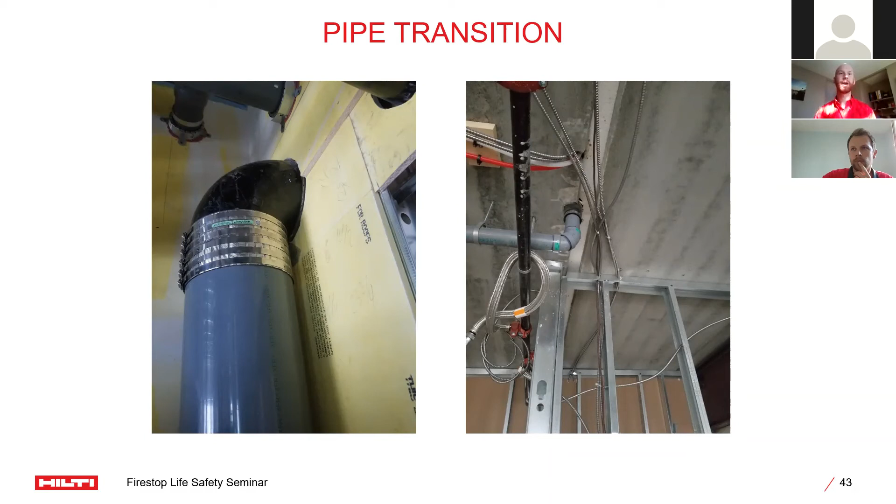Bigger concept, this is all life safety. So this is code intent to make sure that this isn't acceptable, and we need to make sure this isn't running through on a lot of our projects.

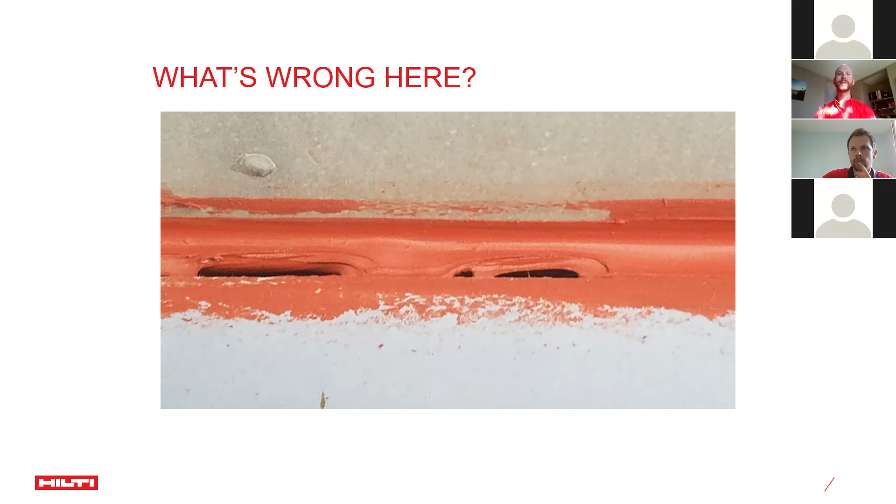What's wrong here? Obviously there are gaps in that fill material. A lot of chemical products, because of their composition, will have some shrinkage in them, as minor as manufacturers want that to be. If there's not the appropriate amount of sealant depth applied during construction, we can be left with openings in that top of wall joint or penetration. So we need to make sure there's the correct amount of sealant depth to ensure that the firestop product and system is compliant to that listing.

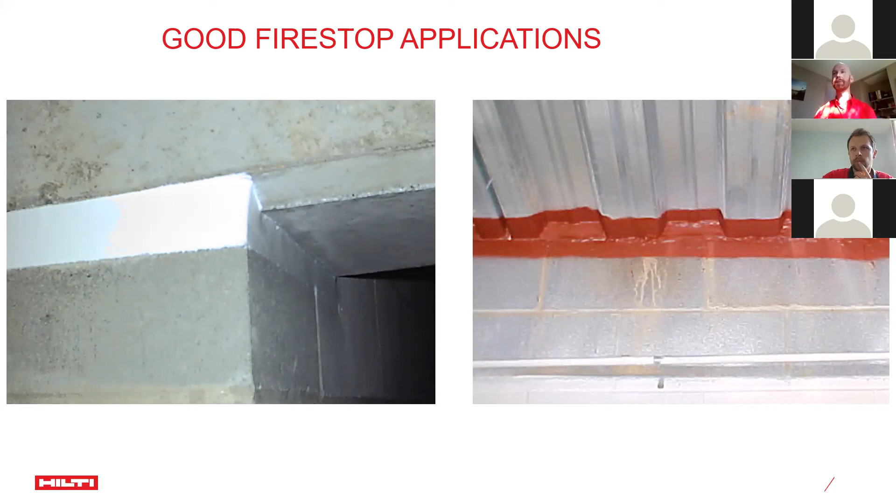So once you've applied that sealant, the instructions for use require you to use some sort of trowel or putty knife to make sure it's a consistent depth, and that's what we really want. On the picture on the right, in contrast to the floor example we just showed, you can see there's clearly no exposed mineral wool, so we've got the required material thickness, and we also have that minimum overlap on both our block wall and metal deck assemblies to ensure it's compliant with the code or the tested system.

This is really good practice that Andre and I are really trying to encourage our customers towards, and that's labeling of firestop systems. It makes inspection a lot easier when we know the tested system is labeled right next to that application. For the future use of the building, if there's any rework or construction done 10, 20, 50 years later, they'll be able to come back and reference that tested system used in the original application. This is really good practice we're definitely encouraging both our specifiers and contractors to put out in the field.

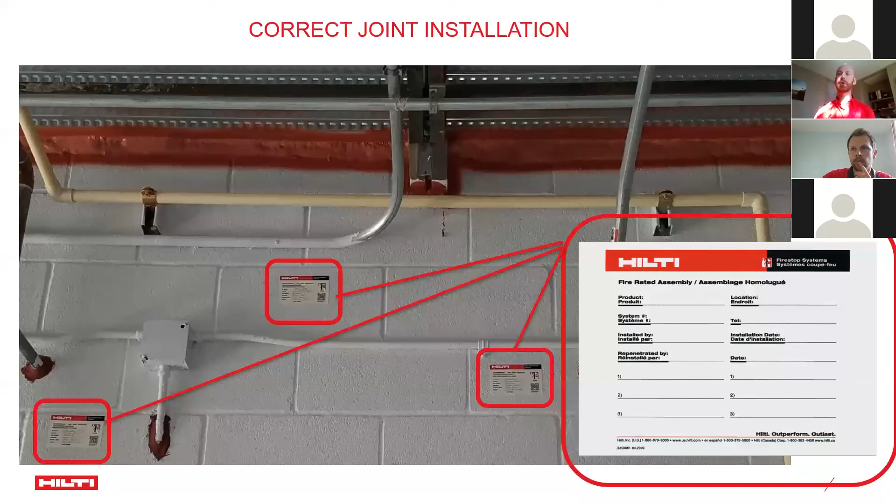Just to give you an idea of what Hilti has to offer: Hilti is the number one firestop provider worldwide. We're not just local to Calgary, Edmonton, Alberta, or Canada - we are a global company. We've got two fire protection specialists local to Calgary and Edmonton - I'm in Calgary and Andre's in Edmonton. We offer firestop training to a lot of our contractors, to the specification or design community. We reach out to engineers and architects to do training with them, and training to the inspection community as well. We have our own in-house fire protection engineers with specific engineering degrees focused specifically on fire and life safety.

We do create our own engineering judgments based on tested ULC or CUL systems and the IFC guidelines. Furthermore, we've got 30 account managers specific to the different trades within the construction community in Alberta, so we've got plenty of boots on the ground to assist our customers with any questions they might have.

And because we are local, we're able to do job site observation walkthroughs, not to be mistaken for inspections, but we will walk through job sites with our customers to offer guidance on how to build safe, code compliant Firestop assemblies.

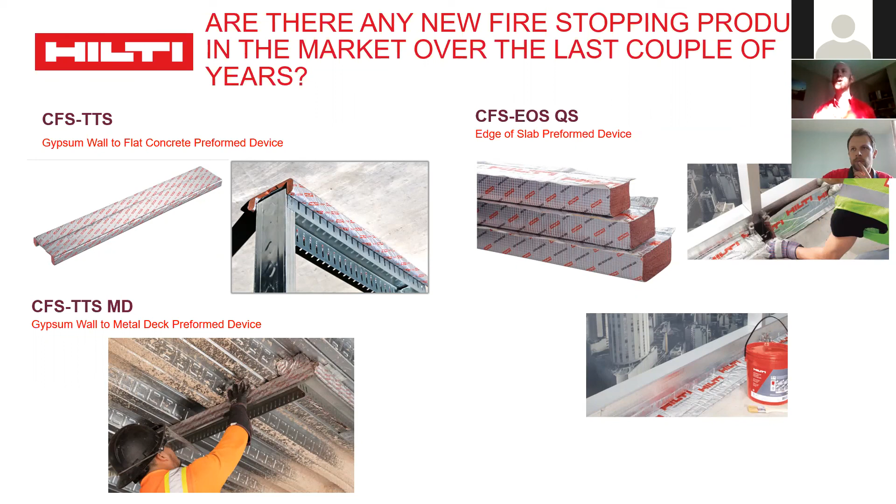The next question we got: what is the maximum gap or number of cables before using a donut? The real answer is it will depend on the tested system. As Andre and I mention quite often, there are a lot of different applications or attributes that go into developing a tested system, annular space, the substrate, the fire resistance rated wall or assembly, the type of penetration, and the sealant used.

Just to give you an example, we've got three different products you can use on cables running through a gypsum wall, with three different tested systems that will give you different amounts of cable fill for different applications. I understand where this question is going, but I would always revert the answer back to the specifics of the tested system that the contractor has applied. So those were a couple of the questions we got beforehand.

Andre, have you got any questions in the chat there? Yes, the first one is from Tim: what is the life expectancy of intumescent fire stopping, and does water adversely affect intumescent fire stopping?